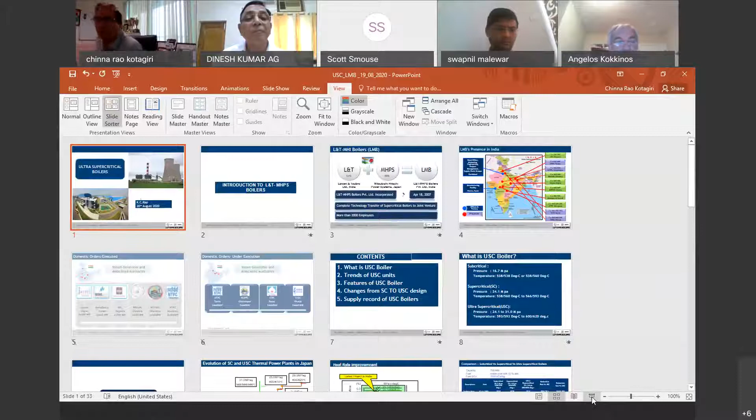Everybody is able to see the full slide mode? Yes sir, it's visible. Okay, of course before I go into the technical part, because maybe some people may not be knowing our company, since it is L&T MHPS Boilers, I will briefly show two slides of what we are doing, what is our company.

Sorry, it's not moving. Next slide has come or no? No sir. Now it has come, okay. Now it has come, yes.

This is a joint venture company between L&T and MHPS. L&T has 51% stake and MHPS has 49% stake. We call this company L&T MHPS Boilers, in short term LMB. This joint venture has been incorporated in 2007. The complete technology transfer for supercritical boilers is included in this joint venture. Right now we have more than 2,000 employees working for this joint venture who does only supercritical boilers.

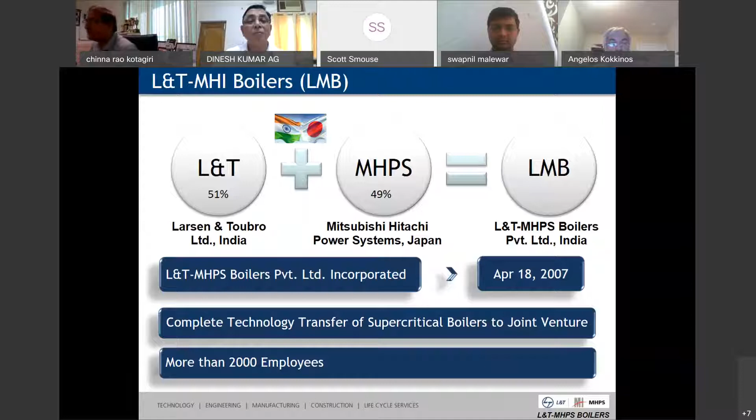If you go to the next slide, you can see that our main head office is in Faridabad, where we have marketing, engineering, project management, and supply chain groups sitting. And we have a manufacturing facility in Hazira, Surat, where we manufacture all our pressure parts. You can see that in the last 10 or 11 years, we have executed many projects.

You can see the units starting from Rajpura, Chhabra, Nigrie, Malwa, Koradi, and Khargone. All these projects have already been commissioned and handed over to the customers. The units Tanda, Ghatampur, Buxar, and Khurja are under execution right now. NTPC Khargone is the first USC unit which has been commissioned in India, and that has been done by us. This is briefly about our company.

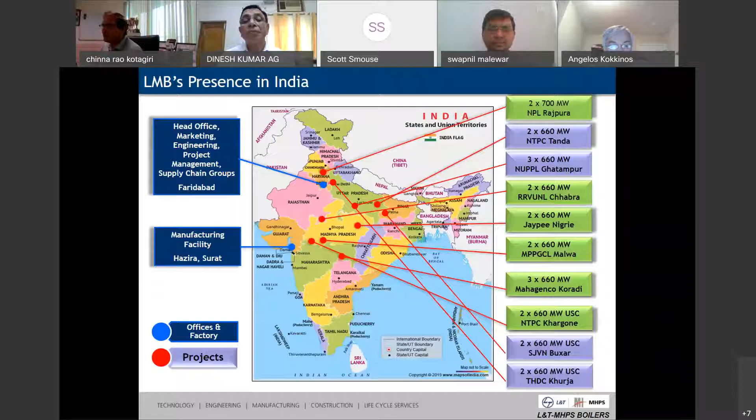Now I will come to the ultra supercritical boilers introduction. This, of course, everybody in this audience must already know, but just to refresh, I have given subcritical, supercritical, and ultra supercritical definitions.

You can see that pressures of 16.7 megapascals is subcritical, with temperatures up to 560 degrees. Supercritical can go up to 593 degrees centigrade. When it comes to ultra supercritical, pressures can increase from 24 megapascals to 31 megapascals, and temperatures can go from 593 to 620. This is, of course, there is no universal definition — each country has different definitions. But in India, we follow temperatures above 593 as ultra supercritical boilers.

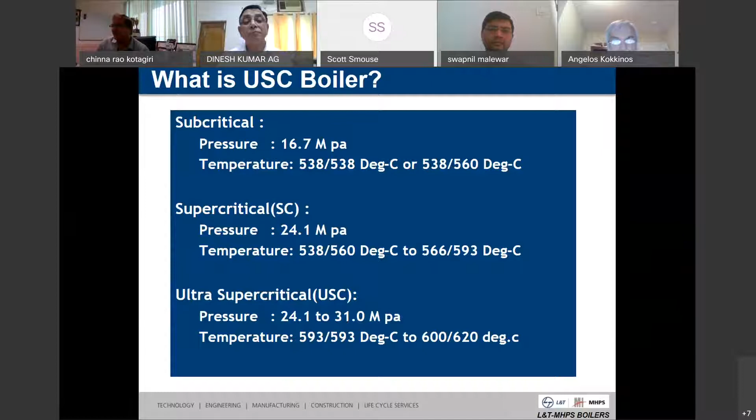So this is briefly about what USC boilers are and the trends. If you look at the supercritical units, you can see here. Since our partners are from Japan, I am giving the history of Japan, where they started the supercritical boiler very early, in 1968, with oil-fired boilers.

From 1968, it moved to coal-fired, and then coal-fired progressed to ultra supercritical in 1998. The first unit of MHPS was commissioned in 1998 with ultra supercritical parameters of 600 and 600. After that, it was increased a little to reheat temperatures up to 620. Though it reached that level worldwide, in India we are now at the 600 level. That is the first unit we supplied, to Khargone.

So that is an ultra supercritical unit. But the only change here is that the pressure is not 24.5 megapascals. In Khargone, we are giving it 27 megapascals, so the pressure is a little higher.

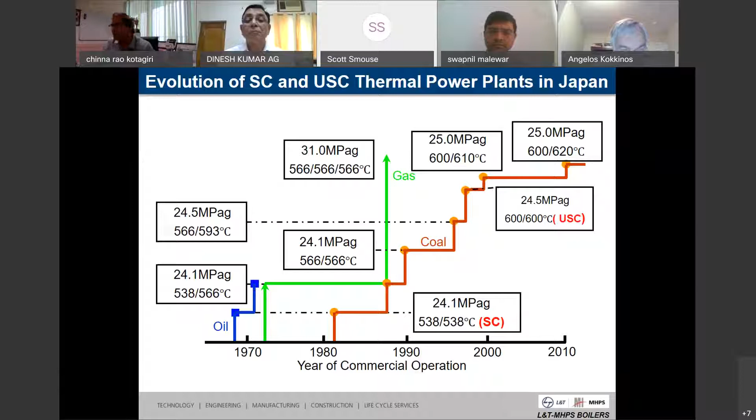This is just to show the heat rate improvements, how it goes from a subcritical unit to supercritical, and supercritical to ultra supercritical. You can see here the latest project in India. I am showing that for ultra supercritical we are at 600, but the pressure is a little higher, that's why we have shown the star a bit on the upper side. So how the heat improvement takes place is shown in this slide.

You can see that from supercritical parameters of 566, 593, if you go to 600, there's approximately a 1.3% heat rate improvement. Since we are increasing the pressure, maybe another 0.1% will increase, so it may go to 1.4 or 1.5 sometimes, depending on the conditions. That is how it generally varies from supercritical to ultra supercritical. Of course, if you are able to go up to 620 degrees in the reheater, you may get another 0.5% heat rate improvement.

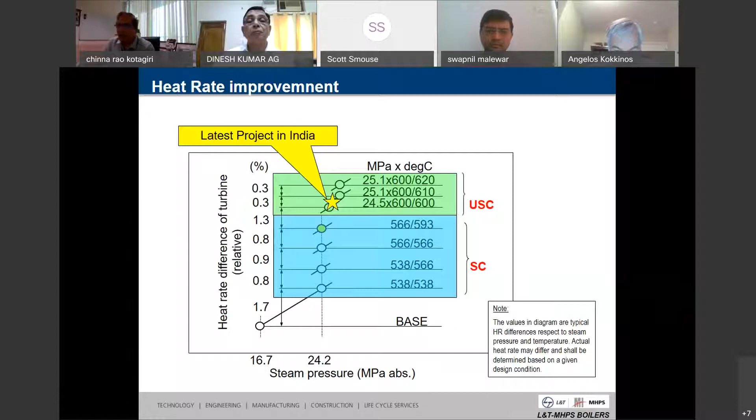The next slide, just to give an idea, though there are a lot of assumptions in it, shows that for a 700 megawatt unit, going from subcritical to supercritical and then to ultra supercritical, how the heat rate improves and how much savings happen in coal consumption, how much ash generation reduction will happen, and how much CO2 and SOx will reduce. Just for academic interest, we prepared this slide. You can see it is almost a 5.5% improvement from subcritical to ultra supercritical in all parameters, whether turbine heat rate, plant heat rate, coal consumption, ash generation, or CO2 and SOx - everywhere you get that much benefit.

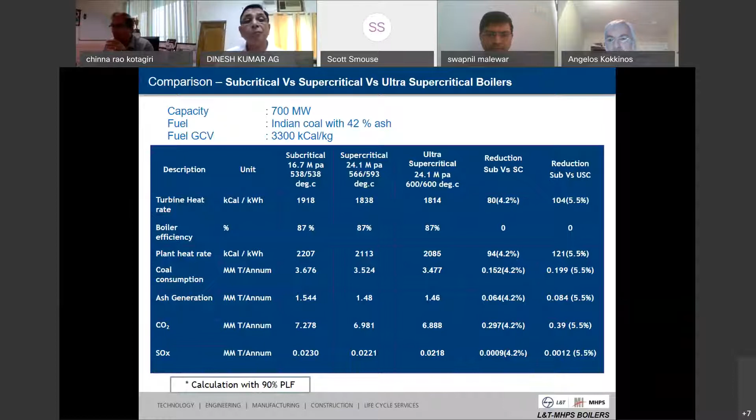Now I come to the ultra supercritical boilers which we have supplied. I'll show you the features of that particular type of boiler. You can see our boiler has some unique features. This is the ultra supercritical boiler supplied to NTPC Khargone. We have a vertical water wall - unlike most OEMs who supply spiral wall for supercritical boilers, we have a vertical water wall with a rifled tube in the furnace. We also use high steam temperature, 600-class high temperature resistant materials, especially for the final superheater and final reheater.

The third unique feature is we have a twin firing vortex - we have two fireballs in the furnace. Unlike other boilers which have a single fire vortex, or wall-fired, front-fired boilers, we have a twin fire vortex in a rectangular furnace wherein we have two fireballs within the furnace. Though we started this joint venture in 2007, at that time there were no NOx requirements in India - it was around maybe 750 to 760 ppm, something like that was the requirement.

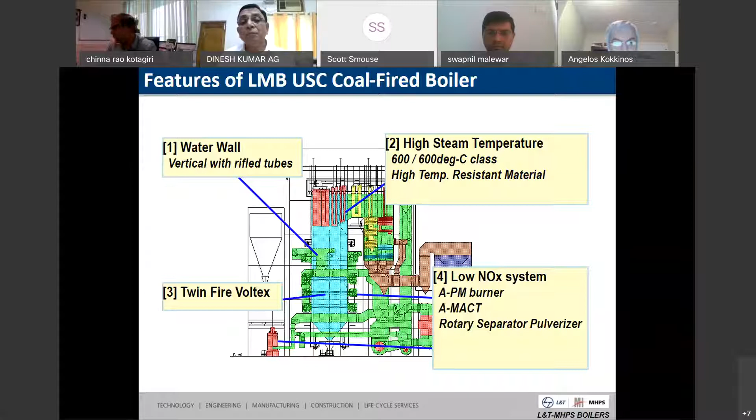In the plan you can see the two fire vortexes forming. From each mill, 4 pipes come out, and they are divided into 8 pipes. Each four pipes form one fireball within the furnace. The furnace cross section is rectangular, and you can see two fireballs happening.

With this, what happens is a low heat input per burner, because the number of burners is doubled. So the heat input to each individual burner is less, and that's why the slagging potential is very low in the furnace.

Final reheater temperature control is done using second pass gas side dampers. We have a second pass with split pass, one superheater side and one reheater side damper control. We control reheat temperature with the dampers. Though we have a tilting mechanism, it comes only afterward. First we operate with the damper and control reheat temperature without any spray. Only if we're not able to do it do we use tilting, as a secondary option. The superheater's temperature is controlled by the spray.

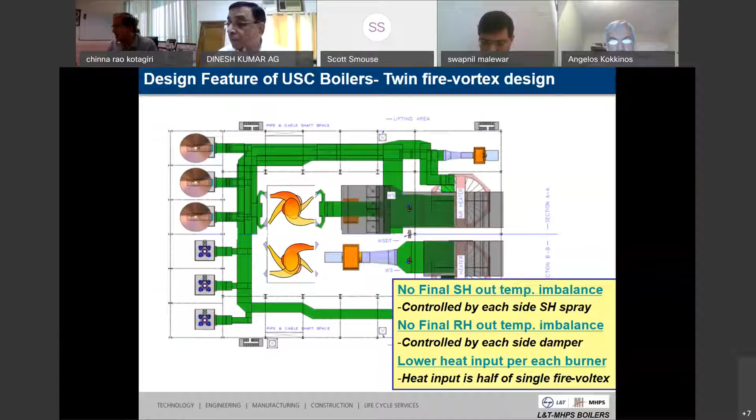These are the basic features of our boiler.

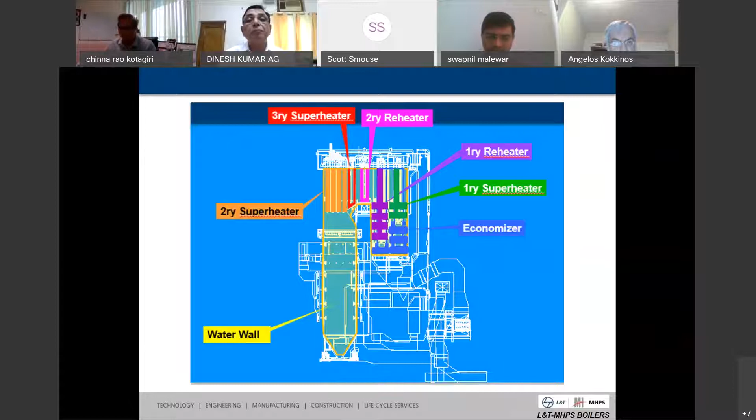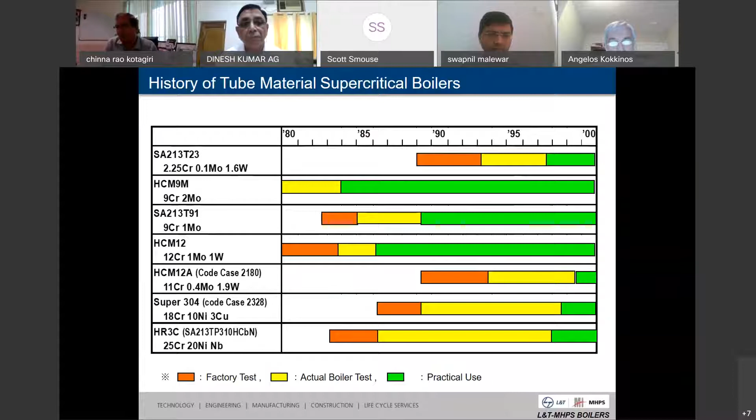MHPS does a lot of research when introducing any new materials for high temperature applications. When a new material is introduced, they do a factory test and then apply it in an actual boiler test. Once it succeeds, only then do they go for practical use. For some high alloy elements like Code Case 2328 and HR3C material, factory testing and actual boiler testing have taken almost 10 years of research before applying those materials in practical use. A material that comes into the ASME code is not just applied to high temperature applications in the boiler immediately—a lot of research is done for creep and fatigue before it's applied. I just want to stress upon that.

These are some of the ultra supercritical boilers and advanced materials we use, called Code Case 2115, Code Case 2328. These are 18 chrome nickel material and 25 chrome nickel material, T92, and Code Case 2199, T23, depending on the requirement. In Indian boilers so far we have not used T23, but our partners have experience using T23 in the primary superheater and primary reheater zones.

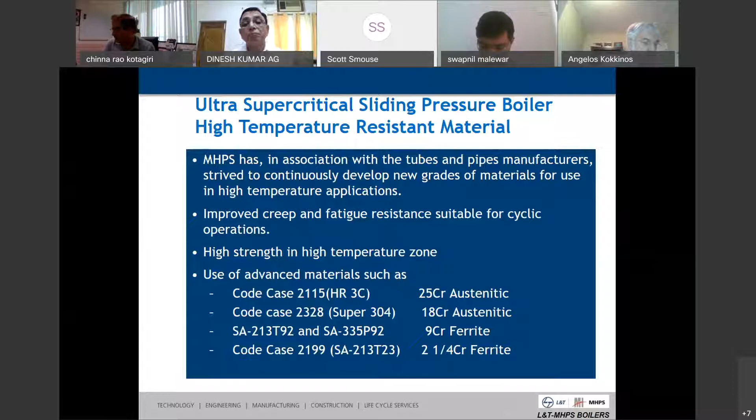This shows what materials we use in the ultra supercritical boiler. In the secondary superheater, final superheater, and final reheater, most materials are stainless steel, Code Case 2115 or Code Case 2328. These are the materials we use, except for the inlet area where we use T22 material, since metal temperatures are lower there. Otherwise all other material is stainless steel.

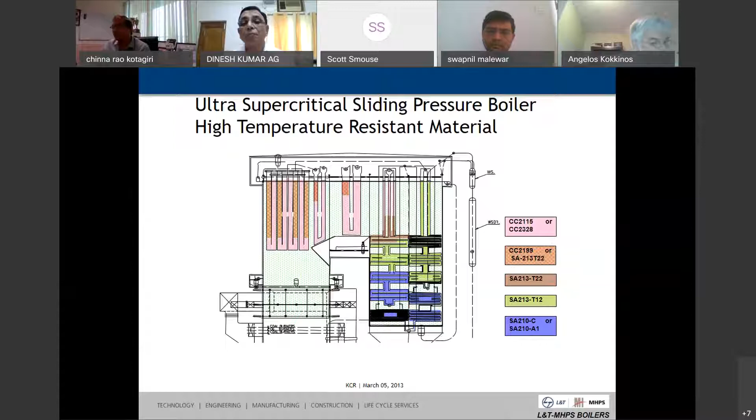When I say high temperature resistant material, we don't use T91, T92 materials because they have high potential for steam oxidation. So in the high temperature zones, in the gas path, we don't use T91 and T92 materials. For all other second pass areas, we use T22, T12, and SA210 grade A1. These are the materials we use, and we've presented them by section, showing how different materials are used in each.

These are some of the burners we use, low NOx burners, which we call advanced pollution minimum burners. In the burner itself, we have staging, two-stage combustion.

They have high ignitability and combustibility, high occupation rate of fire vortex in the furnace, and uniform heat flux distribution, because we have a twin fire vortex in the furnace across it, the heat flux will be uniform. Because of that, we achieve low NOx, low unburnt carbon, high efficiency, good operability, and low slagging tendency.

Since we have a twin fire vortex, the number of burners are more, so the slagging tendency will be less.

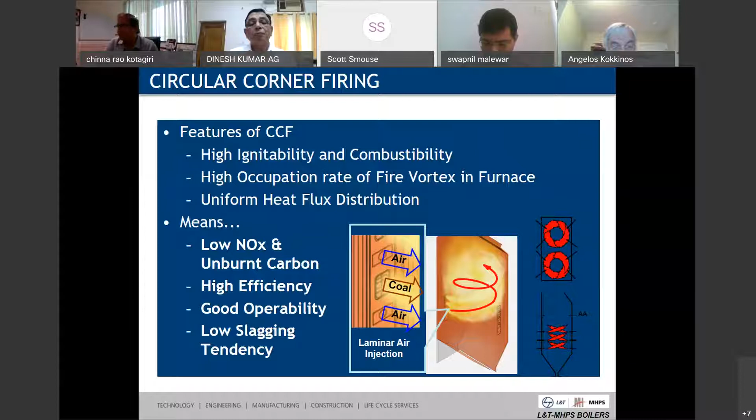This is again the burner front. You can see the main burners, and above the main burners we have additional air ports. With this particular technology, we achieve the low NOx.

I can tell you that our boilers, most of them at 100% BMCR, achieve around 115 to 125 ppm. At low loads it may go up to a maximum of 150 to 175 ppm at part loads. So that is the sort of burners we have already supplied, and our boilers are operating in India.

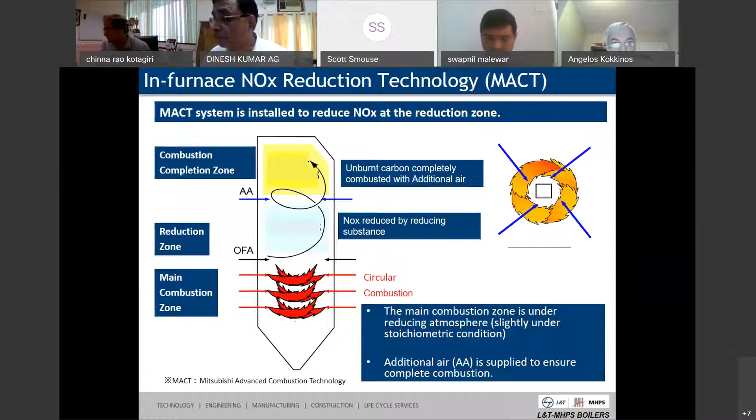Now I want to show, from supercritical boiler to when we change to ultra supercritical, what changes are going to come in the boiler basically.

In the pressure parts, the final superheater and final reheater surfaces will increase because we are increasing the temperature from 566, 593 to 600.

The tubes and thickness will increase because the metal temperatures are going to increase. The thickness of the tubes has to be changed for the final superheater and final reheater.

Headers' thickness and diameters will change.

Of course, there is no material change from supercritical to ultra supercritical up to 600 degrees centigrade. But if you go above 610 degrees centigrade, we may have to use Code Case 2115, which is a 25 chrome stainless steel material.

It depends on the metal temperatures which we calculate, but for some portions we may have to use Code Case 2115. Also, for some pipe materials, because of the temperature increase, the material changes from P91 to P92 in the headers as well as the critical piping.

Because the temperatures are increasing, shot peening of the stainless tubes has to be done for the final superheater and final reheater at the outlet of the tubes. Only one end, the outlet, needs the shot peening.

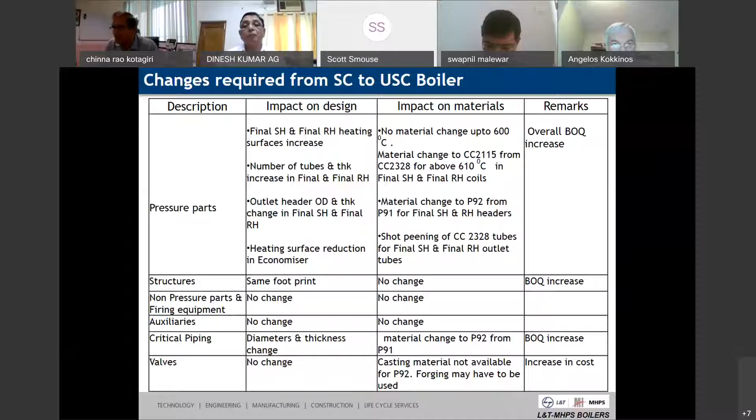This is again the same slide I had shown earlier, showing where the changes will happen - basically in the final superheater and final reheater, and in the respective headers as well. That's what I said in the earlier slide, represented again here.

Code Case 2115 will be used only when the temperature crosses normally 610 degrees. In India, since we have not gone to the 610 level, at least in Khargone we have not used Code Case 2115, as it was not necessitated. So we have not used this particular material.

Of course, P92 we have used for all the headers as well as the critical piping, which has been changed from P91 to P92.

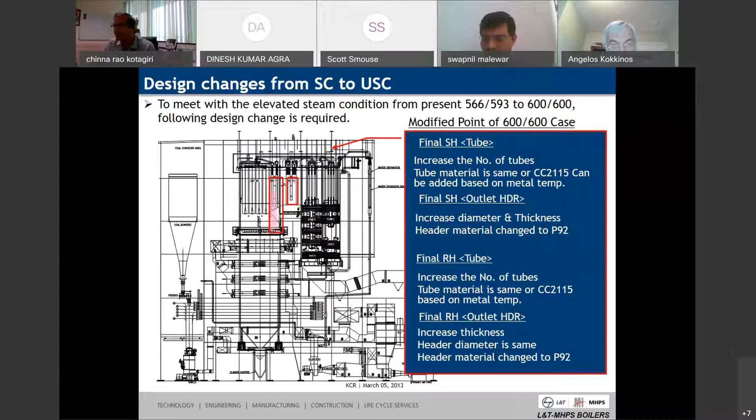That is briefly about ultra supercritical boilers, supercritical to ultra supercritical. What are the changes going to happen?

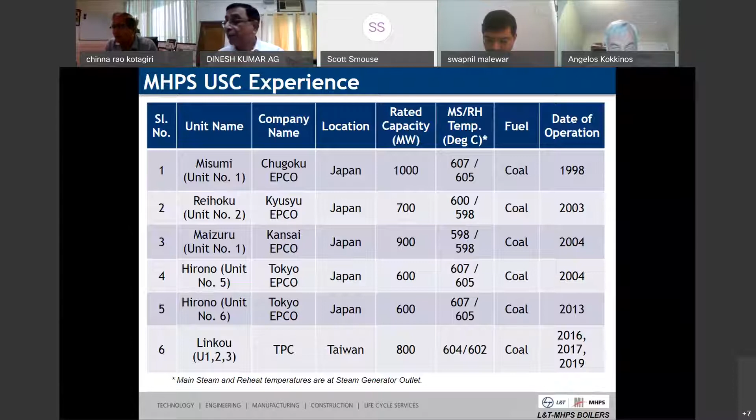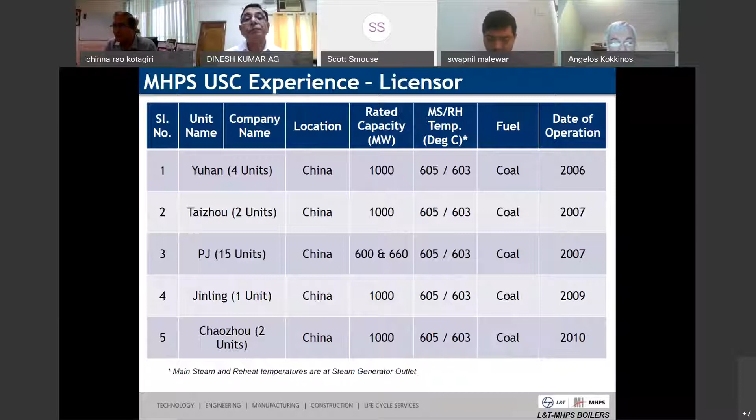I'll show some of our experiences in ultra supercritical boilers. Our partners MHPS Japan have experience. The Misumi unit, commissioned in '98, is operating at 607, 605 boiler outlet temperatures of main steam and reheat. There are other units, Maizuru, Hirono, Linkou, all Japanese units supplied by MHPS with ultra supercritical parameters. They have also supplied through the licensor in China with the same MHPS technology.

There are maybe more than 20 units operating in China with the same 600 degree temperatures. In India, we have done our L&T MHPS boiler. We did NTPC Khargone, the first ultra supercritical project, commissioned recently. The first boiler was declared COD in February 2020, and the second boiler in April 2020. Now we got the latest orders, 2 orders from SJVN Buxar and THDC Khurja, which are also ultra supercritical boilers under execution. We got these orders only about 1 year back.

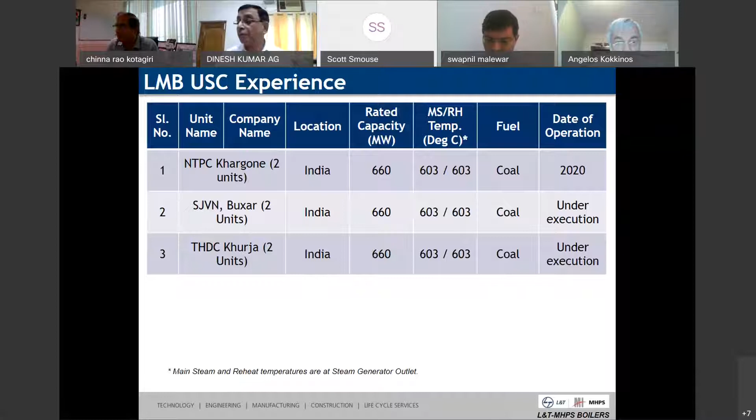Mr. Chidara, I request you to close in 2-3 minutes. Yeah, it's over, that's right. I will be closing in 1-2 minutes.

This is the Khargone ultra supercritical boiler supplied by us. The customer is NTPC Khargone, with commercial operation of unit 1 in February 2020 and unit 2 in April 2020, both completed COD. The steam conditions are 27.2 megapascals and temperature 603, 603. Fuel is Indian coal.

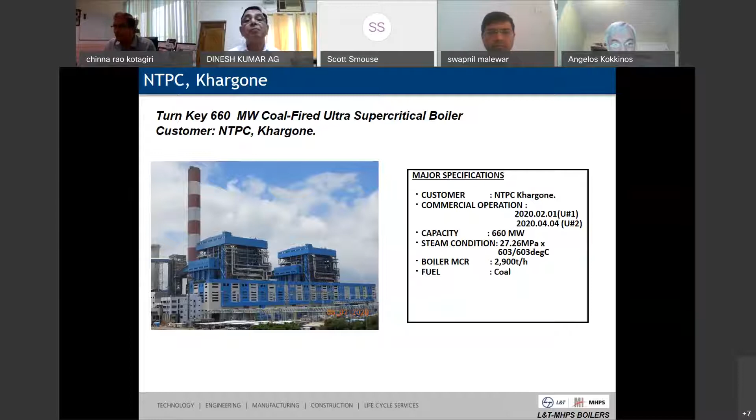As a starter fuel, LDO is used. We have successfully completed the PG test of the first unit about 2 months back, and we got the acceptance certificate from NTPC. With this, I am closing my presentation. Thank you very much. If you have any questions, you can ask in the chat box, I will reply.

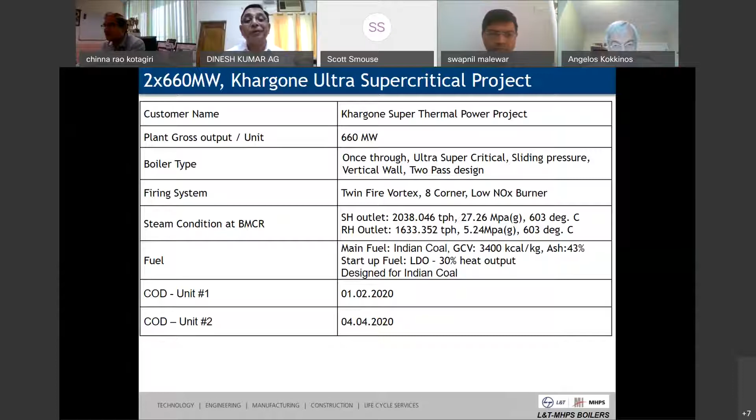Thank you very much, Mr. Agarwal. Sir, you are on mute.

Thank you, Mr. Chinna Rao, I really appreciate you sharing the experience in this area. Now I request Mr. V. Tanwani, AGM from NTPC, with Mr. Sagar Luthra and Mr. Abhishek Saini assisting him. The paper is on India's first ultra supercritical thermal power plant, Khargone. I invite Mr. Tanwani and his team to make their presentation. Thank you.

Mr. Tanwani. Yes, sir. Thank you, Agarwal sir, for giving this opportunity.

We welcome all participants to India's first ultra supercritical power plant, Khargone. In the next few minutes, we'll be covering project synopsis, then discussing key design features, and lastly key operational features and issues. Myself, Mukesh Kumar Barma, along with team members Sagar Luthra, Abhishek Saini, and our HOD Sri Vijay Tanwani sir, will be taking over this presentation.

Khargone, being the first ultra supercritical power plant, will operate at a pressure of 270 kg per square centimeter and a temperature of 600 degrees Celsius. We will have a unit efficiency of 41.5%, leading to a specific coal consumption of 2.6 with 3.3% CO2 emission reduction, making us the highest efficiency power plant in India.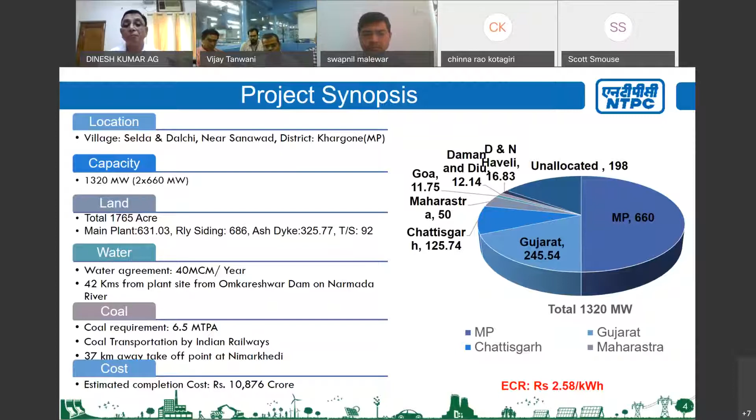The power has been allocated to 7 beneficiaries, with MP having the biggest share at 50%, followed by Gujarat, then Chhattisgarh, and then Maharashtra. Our current share is 2.58 rupees per unit. Coming to the commissioning timeline, for unit 1 we did boiler light-up on 29 December 2018, and within 180 days, we synchronized the unit on 27 June 2019.

We achieved full load on 28th August 2019, and the unit was declared commercial on 1st February 2020. Whatever learnings we made in Unit 1, we applied in Unit 2, which gave results in terms of reduction of timelines.

As far as Unit 2 is concerned, we did BLU on 21st November 2019. Within a span of 40 days, we synchronized the unit on coal on 31st December 2019, and within 59 days from BLU, we achieved full load on 19th January 2020. The unit has been on commercial operation post 4th April 2020.

Coming to key design features, we will be operating ultra-supercritical parameters, 270 pressure and 600-degree temperature, with a unit heat rate of 2070.

As far as boiler design features are concerned, Mr. Rao has covered most, but specially mentioned we have twin fire balls with a combination of rifle and plain tubes, and low NOx burners. As far as the turbine is concerned, we have all reaction stages to meet the peak load, the 105% unit load. We have been provided with overload valves.

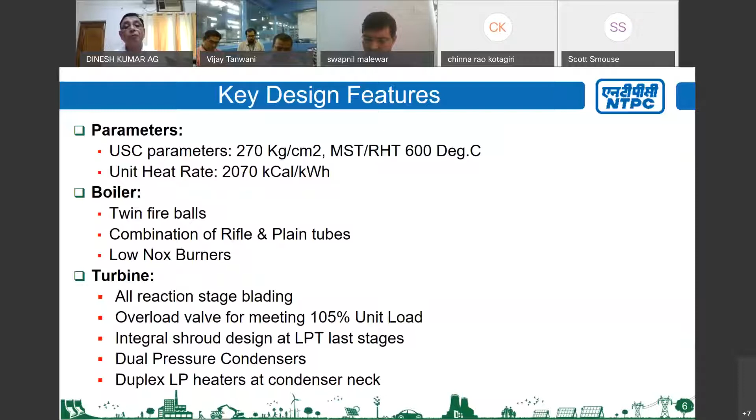Next, we have installed FGD. The technology has been provided by the Chiyoda Corporation, known as jet bubbling technology. We have ESP with a particulate emission level of less than 17 milligrams per normal meter cube.

We have a 400 kV GIS with 15 bays, and this is a compact layout as well. There is no separate zero liquid discharge system; this has been incorporated and built into the system.

We have an ETP system, coal slurry settling pond, AWRS, and STP. All of these together enable us to achieve zero liquid discharge.

As I said, we are taking water from the Narmada river, which is 42 kilometers away from the plant site. We have installed GRP pipelines with sizes of 900 mm and 700 mm.

Also, our township is a smart township with IT infrastructure covering home services, incorporating solar energy, smart energy and water management systems, and security and surveillance systems.

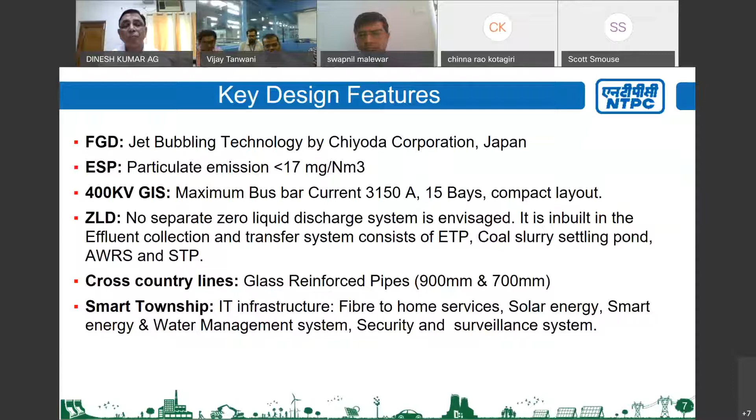Next, the key operational features will be covered by our colleague Sagal Luthra.

Good afternoon, friends. Certain key operational features of this particular boiler are that we're able to achieve the design parameters of 603 degrees Celsius even at part load.

Next, in the tri-sector RAPH which has been provided, the technology used is such that the gap between the sector plate and the seal is adjustable, which helps us maintain the cold end temperature of 116 degrees Celsius with almost 5% inbuilt air leakage.

The 8-corner firing system helps in better combustion. We can say that even in the last year of operation, we haven't faced a single MFT or flame failure, with a fuel coal of 2900 GCV.

Reheater spray has been minimized to almost zero by using GD dampers, and the temperature mismatch between the left and right superheater or reheater is almost nil.

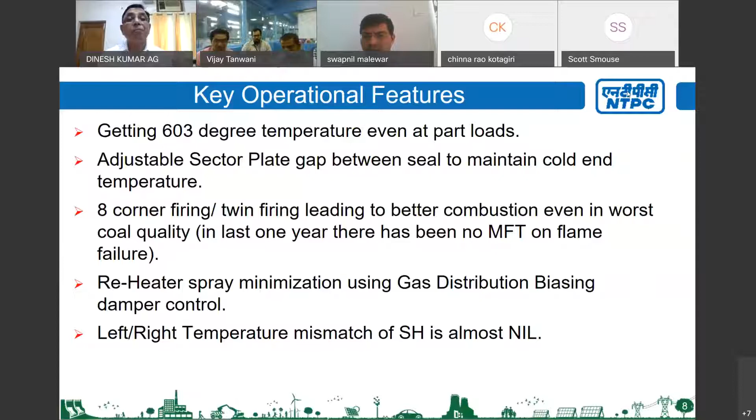One thing I want to talk about is that there is a very smooth transition from dry to wet zone or wet to dry zone, without any metal temperature excursion.

Since the quantity of feed water required for initial startup is very low, around 420 tons per hour, we can actually make a startup in very little time, with 1 MDBFP at only 30% capacity. The DP across the water wall is almost negligible, which helps us save a lot of power in the boiler feed pump.

And since during the startup of the turbine, the soaking speed is at 2300 rpm, this has led to better, more uniform heating of the turbine, helping us achieve better heat-up parameters and reducing the stress level in the turbine.

Next, I want to talk about vacuum deaeration in the deaerator, which helps us achieve dissolved oxygen of less than 5 ppb. Since the deaerator outlet vent is directly connected to the condenser, water loss through the deaerator vent is almost zero, as it's being utilized in the condenser.

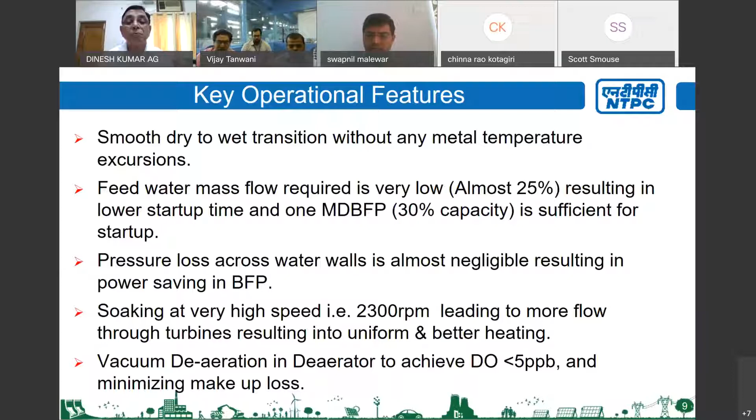So the next thing I want to talk about is the key issues we are facing in the operation of this ultra supercritical boiler. That would be covered by my counterpart Abhishek Sen. Thank you, sir. So apart from all the good things, we have some issues also.

The cleanup cycle takes approximately 45 hours during cold startup, because of the supercritical nature of this power plant. We need exceptionally good water quality to ensure good life of the boiler. So the cleanup cycle takes 45 hours, and this results in oil consumption of around 450 to 500 kL per cold startup.

There is no provision of wind box damper control after 30% load, so we don't have any control in the operator's hand. There's also no provision of biasing in the feed water loop. Sometimes the temperature may go out of hand, and without biasing in the feed water loop, which might have been helpful, we have no recourse.

During low loads, it is difficult to get differential pressure for superheater spray flow, because the superheater spray flow is taken from the eco inlet itself. Since at low loads the pressure is low in the eco itself, the spray pressure is very less.

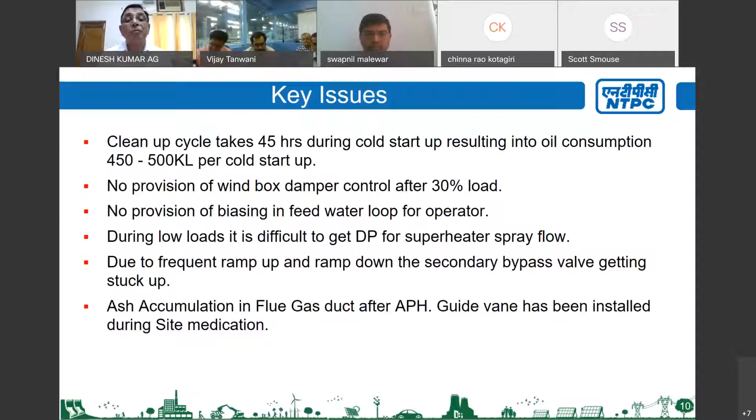During operation of OLVs, abnormal sound is being generated. There is no provision of seal steam pressure control in the TDBFPs. During low loads and high loads, we can't control the seal steam pressure in the TDBFPs, and this has led to some water moisture inside them.

MDBFP scoop auto tracking feature is also not available here. Whenever a TDBFP goes out, we have to load up the MDBFP manually, as there is no auto scoop tracking feature available here.

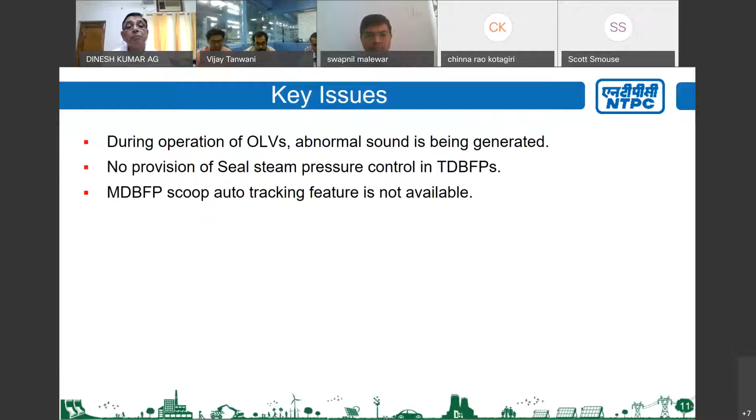So these are some key issues. Apart from this, during ramp up and ramp down, the temperatures vary a lot and we have to control them manually, probably because all the auto loops are not tuned properly. So these are the key issues I discussed. Thank you all for listening to us patiently, and we'll be open for questions later on. Thank you.

Sir, you are on mute. Sorry. Thank you, Tanmay and team, it's a good analysis you have given about the new unit which has been commissioned, and we will take up the question and answers at the end of the session.

Everybody can see this? I think you have to enlarge it. Just a minute. You see it now, sir? Not yet, sir. Could you try resharing your screen? Yeah. It's visible now. Okay, thank you.

So Nabha Power is a 2 into 700 megawatt supercritical thermal power plant located at Rajpura in Punjab. I'll briefly run through the company profile. It has a 25-year PPA with PSPCL, and a coal linkage with SECL. All the major equipment is manufactured indigenously through a technological tie-up with MHPS of Japan, state-of-the-art manufacturing at Hazira.

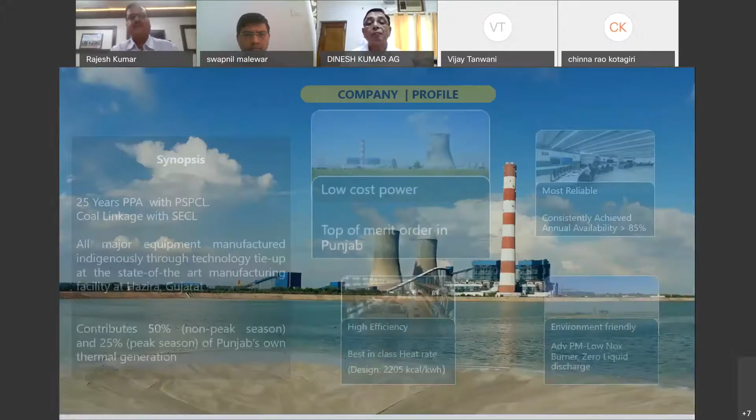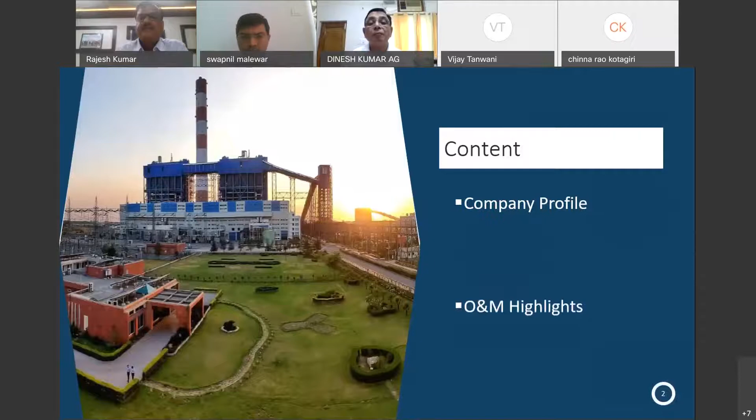Our plant contributes 50% during the non-peak seasons of Punjab's requirements, and 25% during peak seasons. We are top in the merit order of Punjab, and we are most reliable, consistently maintaining availability of more than 85% in the last 5 years. We are one of the most efficient plants, with a designed heat rate of 2205 kilocalories per kilowatt hour. We are environmentally friendly, with advanced PM burners and zero liquid discharge.

This is the performance indicators of the last 5 years. You can consistently see that our availability has been higher than 85%, which is the normative PLF availability. Consistently, since the first year it was 91%, and after that also it has been above 85%.

Our heat rate is also very close to the design. Last year we closed the year with 2281 kilocalories. Our internal target to allow for partial load operation was 2295. So we achieved better than the target last year also.

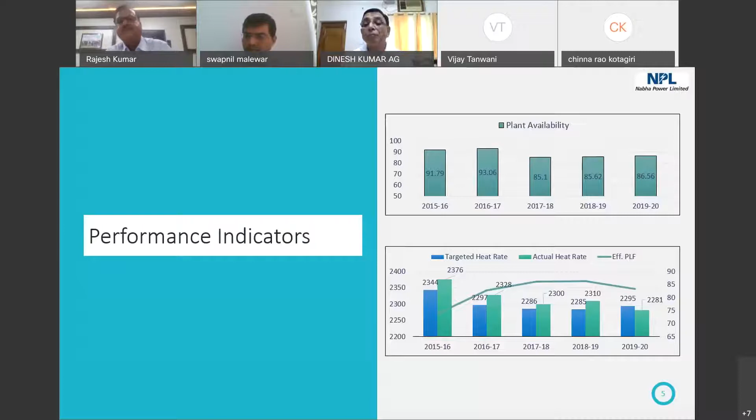All our O&M best practices are driven by 3 pillars, that is safety, reliability, and sustainability, in this order. Our reliability is taken care of by efficient and economical operations of the plant, propped up with monitoring and optimization, and sustainability is through economical and clean generation of the power through effective control, review and monitoring of the systems.

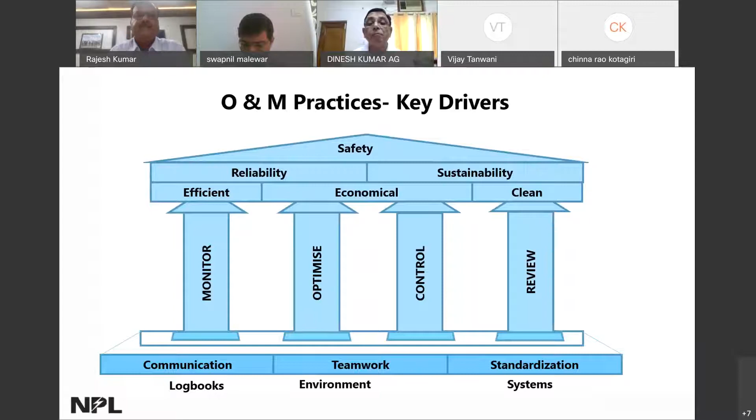We have gradually switched over to reliability centered maintenance after 6 years of operation, and we are on that path of journey. We started with preventive maintenance, corrective maintenance, and a combination of predictive as well as proactive maintenance. Then we switched over to reliability centered maintenance. In future, we can go to a risk evaluation and prioritization system. In reliability centered maintenance, we have lowered the cost with high availability also, so it is an optimal mix of maintenance cost as well as availability.

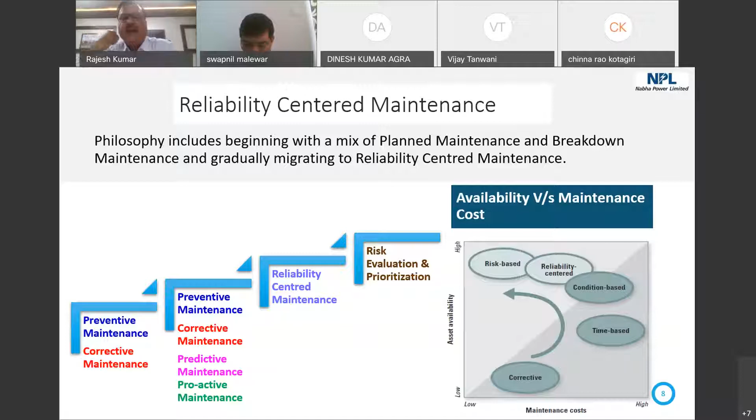As coal is in shortage during the peak season of this plant, we are firing different types of coal from wherever sources we are getting, whether imported as allowed by PSPCL or through different sources as given by SECL. Last year we fired a mix of imported and domestic coal with GCV ranging from 3,300 to 5,700 kilocalories, including Indonesian coal with high VM and high moisture, with moisture content from 11% to around 20 to 22%. This simultaneous firing of 4 different types of coal without any incident was a great achievement. We achieved this with very minimal metal temperature excursion or any adverse impact on combustion, without deviating from the design limit.

This we achieved through development of an in-house automated tool for shift-wise temperature monitoring by the shift personnel, and on a daily basis it was monitored by the senior management team. We developed a special procedure for firing the Indonesian coal of high moisture with high VM to avoid any chance of mill explosion. We closed the year without any incident of metal temperature excursion or adverse impact on combustion, despite simultaneous firing of 4 different types of coal.

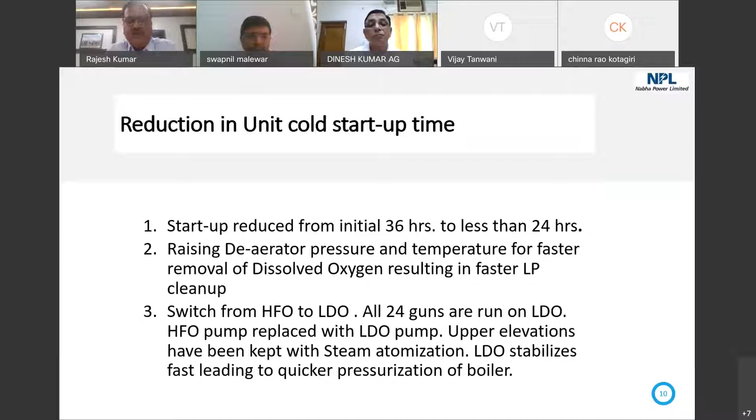In the ash handling plant, all the seal water is harnessed into the clarifier for ash water recovery. This has resulted in a huge saving of around 3,000 metric tons of raw water per day, so this much raw water drawal has been reduced.

We have switched over the bottom ash drawdown mode from shift-wise to a daily basis. Each day we do the bottom ash drawdown to check the flame intensity and whether there is any clinker formation or not, so this is checked daily.

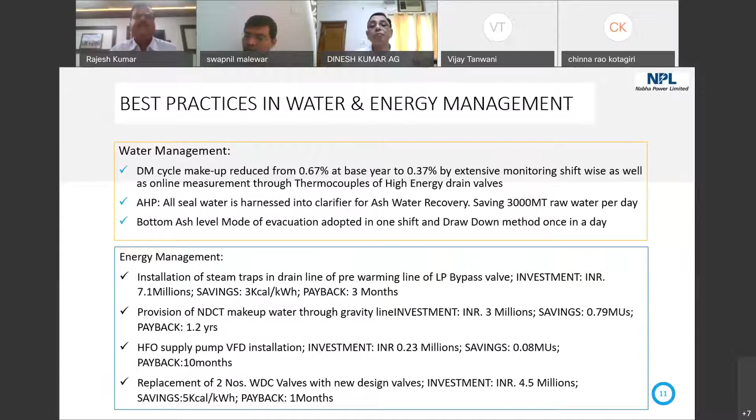We have switched over to oxygenated treatment, which gives increased focus on boiler water treatment. Coordinated water treatment, or oxygenated treatment, is better for reliability and efficiency. The magnetite layer changes over to a hematite layer, which is very smooth with no serrations, and the pressure drop across the tubes gets reduced. On the right side of the slide, you can see that in AVT mode the boiler pressure drop is higher, while in CWT mode, with the passage of time, the rise in DP is very small.

It is almost constant. Effective monitoring has been achieved through online measurements, maintaining optimum dissolved oxygen at the boiler inlet, the economizer inlet, and in the condensate circuit, with online DO analyzers as well as ORP measurements. We have installed Mettler Toledo make chloride analyzers with accuracy less than 1 ppb, because chloride control is very essential at high pressure and temperature for the boiler and turbine. We also get yearly deposit analysis done at a reputed external lab. In a nutshell, the healthiness of SWAS is key for a supercritical boiler.

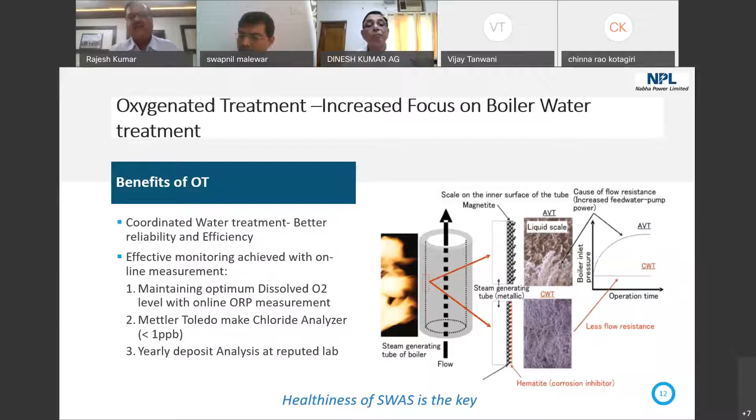We have developed a state-of-the-art coal lab. Through the laboratory information management system, samples are collected through auto samplers and randomly coded. The entire system requires no manual intervention, so the chances of human error or other mistakes are totally avoided.

Rake registration is done, and a barcode is generated on a random basis for each sample. Throughout the testing cycle, nobody knows which sample is which, because as a load center plant we get coal from different sources through SECL, through imports, or through different parts of CIL via multiple sources, so this is very important. Since coal is transported from 1500 kilometers away, there is a high financial implication if there is even a slight error in measurement of GCV.

So this LIMS integrates the GCV, proximate analysis and moisture content, and delivers the final results.

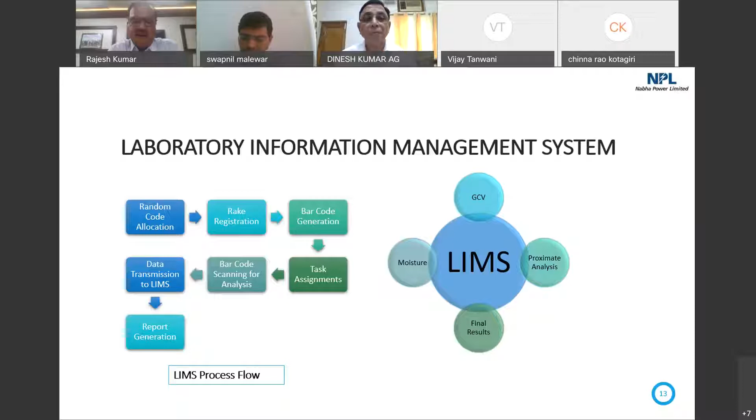Our coal lab is NABL certified. It has all the modern facilities, and a highly experienced team. And the LIMS, as I told, there is no manual intervention; the complete process is automated and without any tamper. It is totally tamper proof.

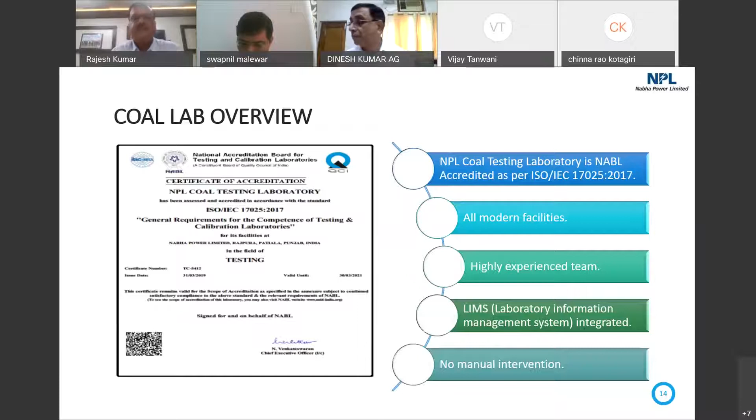As you all know, the power sector is very vibrant nowadays, and it requires a lot of challenges, a lot of monitoring, effective monitoring at multiple levels because of integration of renewable energy, flexibilization, etc. So at Nabha Power, we have taken a lot of initiatives for digitalization.

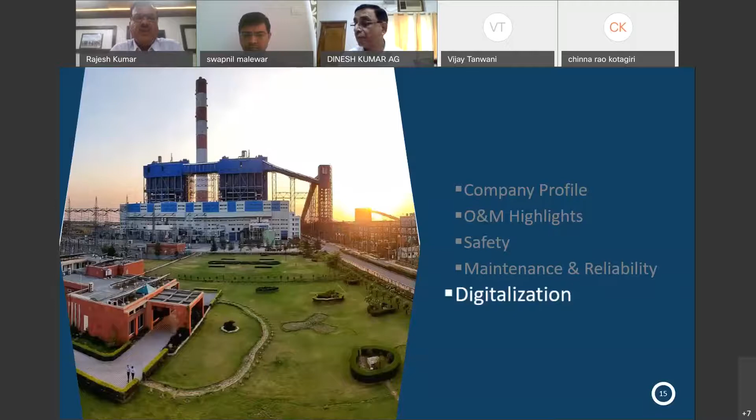We have developed an operator training simulator, a virtual method to provide training to new operation engineers. It simulates startup, shutdown, process transitions and changes, and all abnormalities and runbacks can be built into it. It is a Protex-made software where engineers can simulate different situations, run them, and learn.

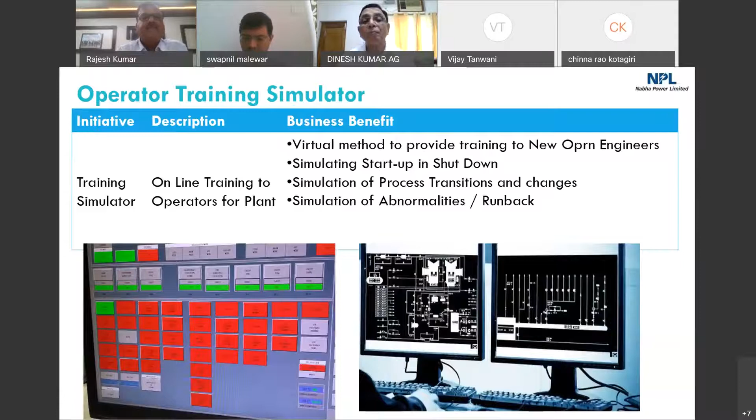We have a very effective vibration monitoring system where all the data is collected at a software, which fetches real-time data from all the critical drives, turbines, fans, mills, etc. It analyzes that through FFT analyzers and orbit analyzing, and finally gives input for the maintenance engineer and our technical services team to do further root cause analysis. This is a very, very effective tool.

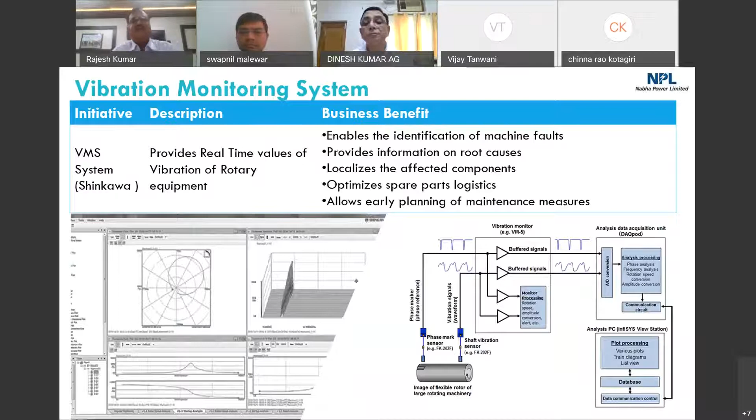We have a maintenance management system, Maximo, which we have put on mobile also. So it is available to all the senior people on the go. Work can be seen remotely from anywhere. It can be securely accessed. Approvals can be done on mobile, so that faster decision making is done.

We have also developed a module in Maximo for HSE, where hazard identification, risk assessment, incident reporting, and risk investigation can be done. Safety instructions and even regulatory compliances are built into it. All senior persons can see on mobile which compliance or which licenses are about to expire, so that corrective action can be taken in time.

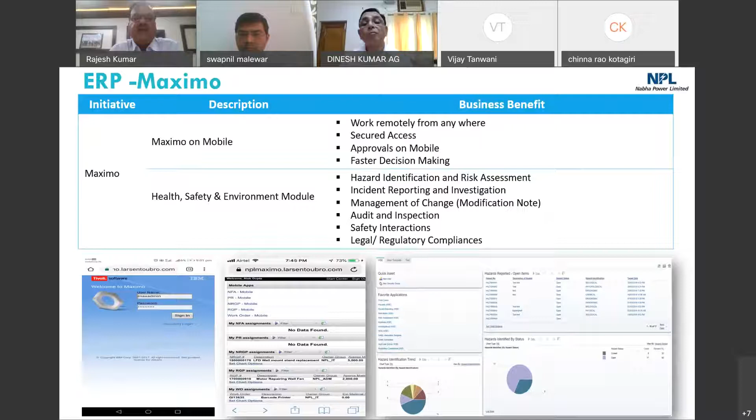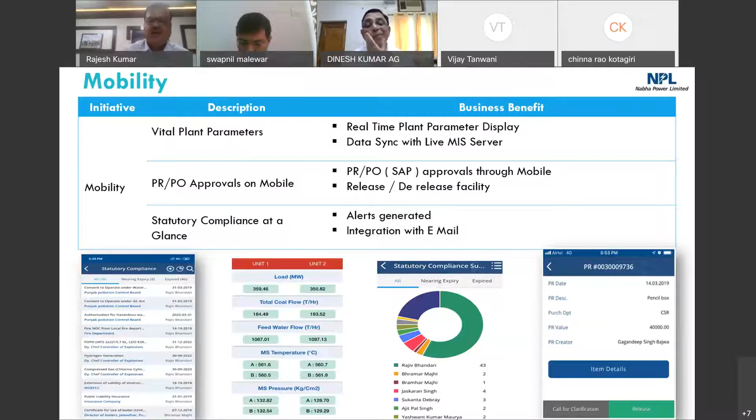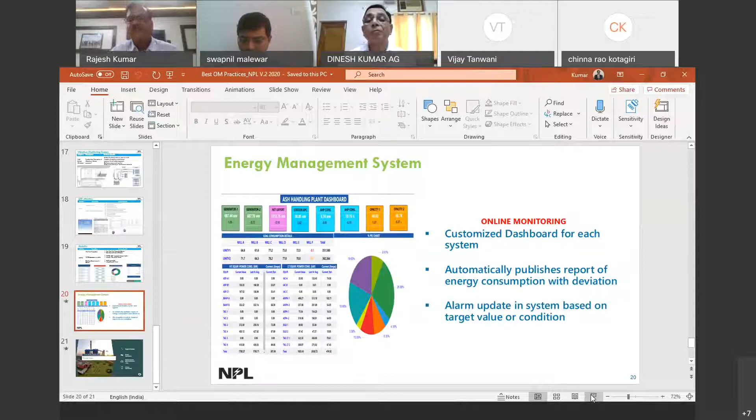Sir, I think we have to close in the next one or two minutes. Okay sir, this was the last slide. Thank you, sir, thank you so much. Thank you, I would be taking all the questions at the last, if any. Thank you, sir, thank you for providing us the insight of Nabha, and Nabha is definitely performing very well.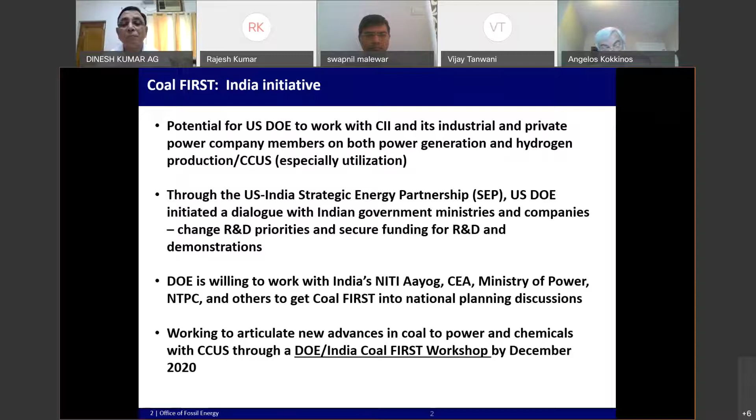What do we hear from the stakeholders in our R&D program? One, that coal must play and will continue to play a role in future energy systems. Two, that there has to be an improvement in base-loaded plant efficiency.

This improvement must apply to both new and existing generation, such that it makes coal generation more commercially competitive, while at the same time eliminating air pollution, including being carbon neutral.

As you have noted, capacity factors, at least in the United States, have dropped to levels of 50%, requiring these plants to spend increasing time in cycling mode, therefore requiring that we address reliability, lower efficiency, and the shortening of expected plant life.

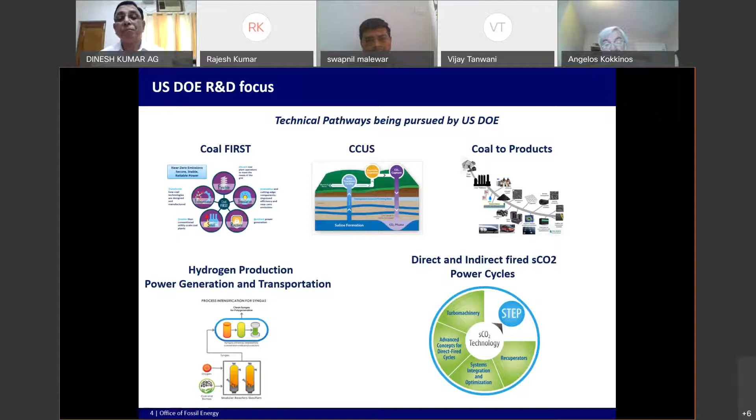And last but not least, looking at creating new advanced power cycles using things like supercritical CO2 as the working fluid, both in a direct and indirect manner. Next slide, please.

Let me talk about Coal First. As I mentioned, it stands for flexible, transformative, innovative, small, resilient plant. By flexible, we mean it has to have high turndown rates, high ramp rates, and shorter startup times.

It also has to be highly efficient, more efficient than the current state-of-the-art advanced ultra supercritical systems. It also has to have zero or near zero, including net negative, CO2 emissions when co-firing coal with biomass.

It is the only power plant R&D effort in the world, as we know it, trying to achieve this type of plant, this type of performance level. We also wanted it to be flexible in terms of, if possible, producing power and/or hydrogen for polygeneration, either hydrogen for power or hydrogen for chemical production.

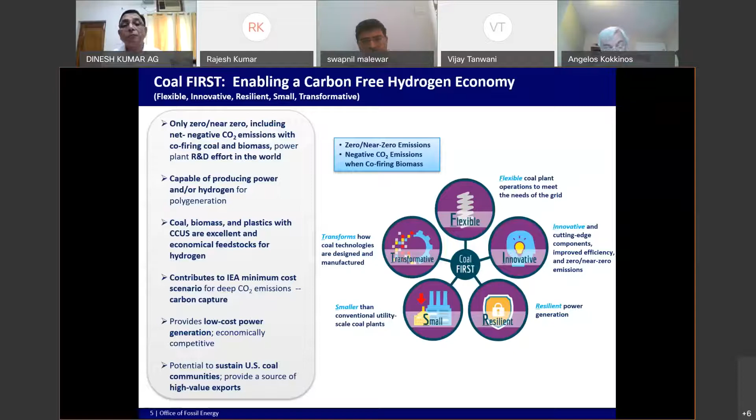Why are we looking at hydrogen? A lot of countries, ourselves included, are looking at possibly transforming into a hydrogen economy. As you see the CO2 emissions, it's interesting to note that transportation now has surpassed power generation and industrial energy generation in terms of CO2 emissions. And hydrogen allows for having a transportation sector that is CO2 free, but also other criteria pollutant free, such as hydrocarbons, particulates, and NOx.

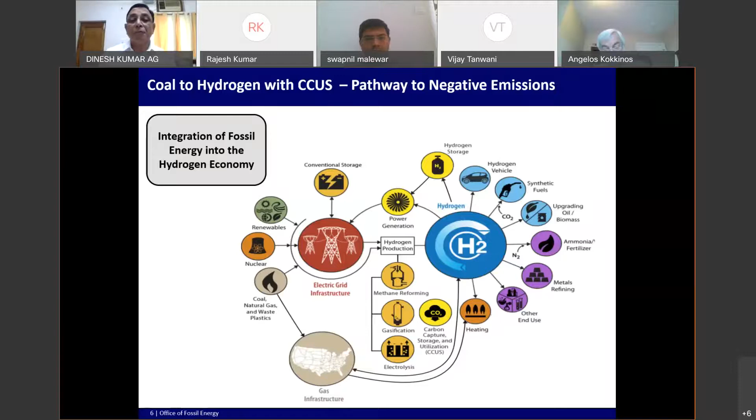Hydrogen can be produced from fossil fuels. And if you go to the next slide, it can be produced at significantly lower cost than what it can be produced through the process of electrolysis, including when the source of electrical power is the so-called free renewable power sources such as wind and solar.

As you can see from this slide, hydrogen produced through coal gasification with carbon capture, CO2 capture and storage system can be produced up to $2 per kilogram. Hydrogen produced from steam methane reforming from natural gas can be with carbon capture, CO2 capture and storage can be produced for approximately

$2.50 per kilogram. We in the United States have done a significant amount of research in using hydrogen for power production, and we have developed combustion turbines that run on hydrogen, and we intend to continue working on advancing this type of technology. Next slide, please.

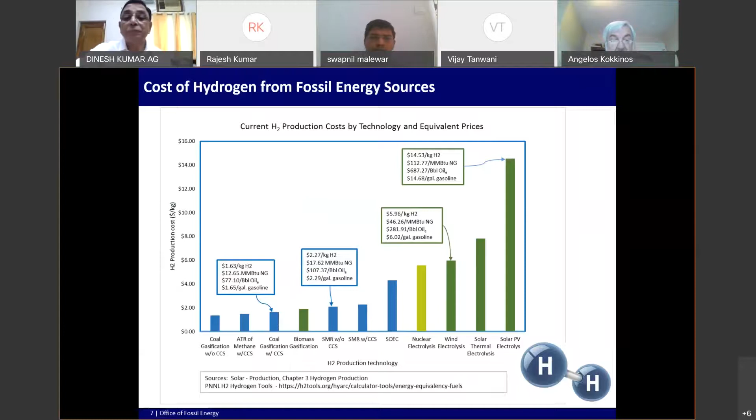I mentioned that hydrogen can be produced through fossil fuels, and indeed that is the case when you look at the world production of hydrogen. Approximately 70 to 75% of hydrogen is produced through steam methane reforming, about 20% is produced through gasification of coal, with the rest being through electrolysis. And the reason for electrolysis being so low is simply economics. The cost of electrolysis needs to be reduced by 75 to 90% in order for it to be competitive. Therefore, coal and fossil fuels are very critical in the production of hydrogen.

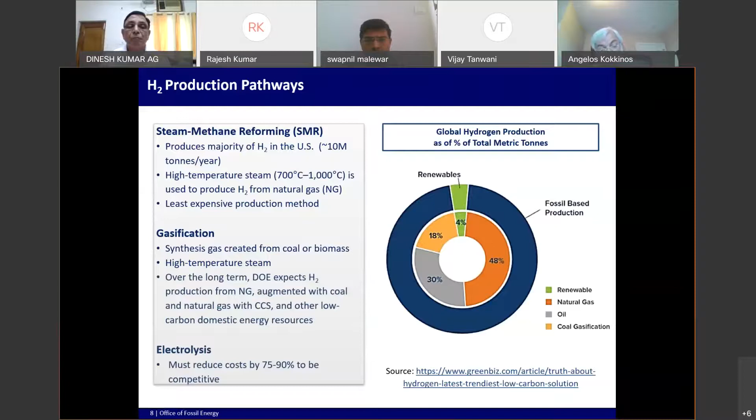Next slide, please. In the Coal First initiative, one of the programs we're looking at is what we call polygeneration, which is basically a system that produces power while at the same time it can produce hydrogen that can be used either as an energy storage system or as a power generation source. And all of that needs to be done with CO2 capture.

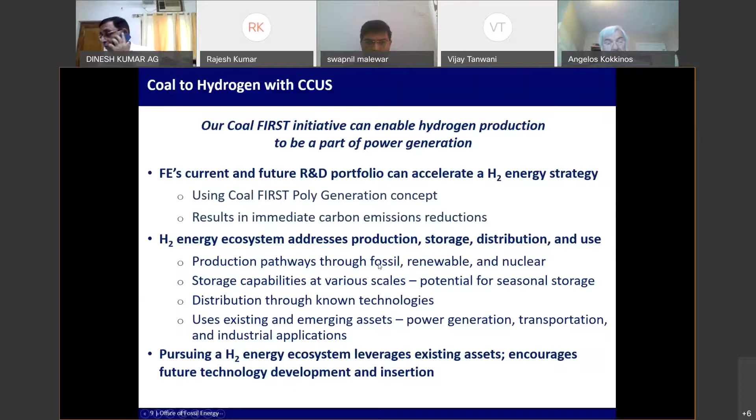Next slide, please. On the Coal First program, we have completed several pre-FEED studies, front-end engineering and design studies, looking at, among other things, a pressurized fluidized bed combustion system with supercritical steam conditions, an advanced ultra supercritical small flexible power plant that uses pulverized coal as the feed system. We looked at the supercritical indirect and direct power generation cycle, and we also looked at a system where we had an ultra supercritical boiler in combination with a natural gas turbine. As a result of all these pre-FEED studies, we are now in the process of requesting proposals for full FEED studies.

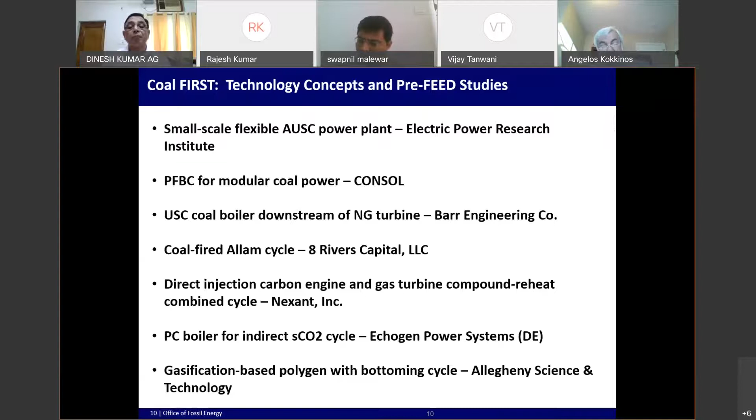And if you can go to the next slide, for 4 technologies. These full FEED studies would be for a power plant size of 50 to 350 megawatts. And the 4 technologies we're looking at are: 1, small, modular, flexible, advanced, ultra supercritical coal-fired power plant. Second, pressurized fluid bed combustion with supercritical steam cycle. Third, a hybrid natural gas turbine with an ultra supercritical coal-fired boiler power plant. And last, gasification of coal and biomass to generate electric power and carbon-free hydrogen byproduct.

All of these with carbon CO2 capture and utilization system. I want to go back a little bit and be very specific on some of the requirements. These systems will require a 5-to-1 turndown. In other words, they should be able to operate down to 20% capacity without any support fuel. Second, they need to have less than 8 hours startup time. And third, they need to have 4 to 5% of MCR per minute ramp rate. So these are some of the requirements we are looking at.

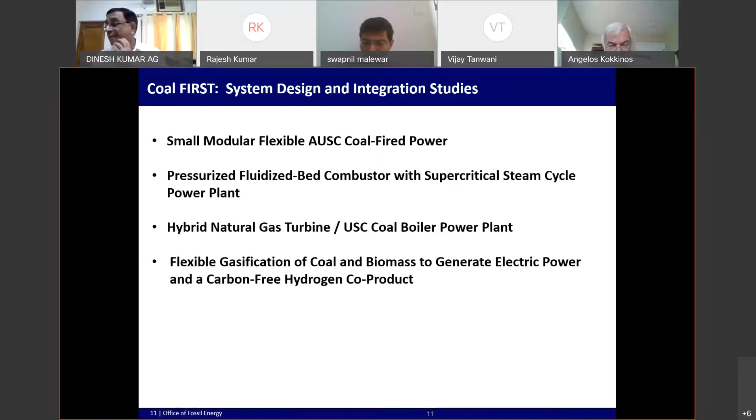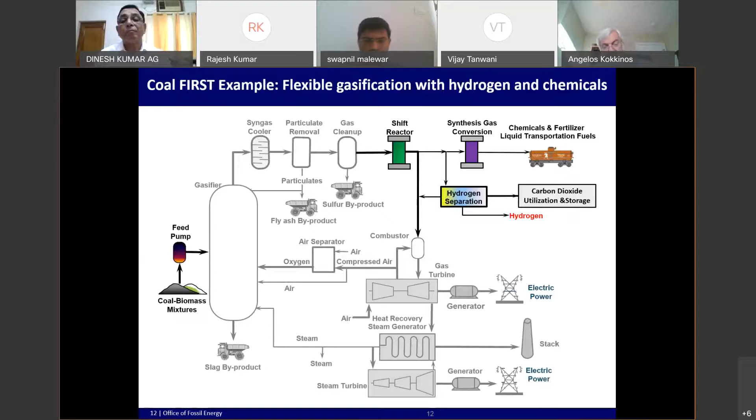If you can go to the next slide, please. This is just a process flow diagram of the flexible gasification power with hydrogen and chemical production system. And if you go to the next slide, I would like to mention this.

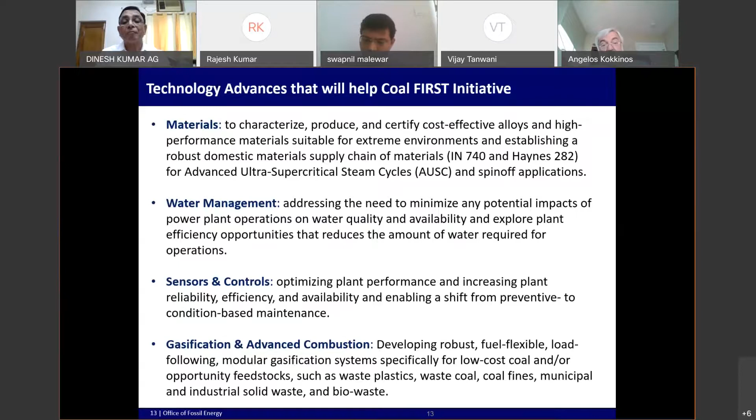Thank you, Angelos and Mr. Scott Smouse, for giving insight about the new initiatives being taken for utilizing coal and competing with environmental conditions to meet all those types of requirements. And I'm sure those types of requirements will be needed in the near future because of the many boundary conditions of the environmental norms.

All the success. I think we have come to the end of the session, and all 4 presentations were very interesting, covering new developments. Some of the papers cover the new units which are commissioned recently in India, and they are very efficient in terms of heat rate, and the designs are also unique in many respects. I'm sure they are going to be leading, and maybe many states will be running these units as base operating stations because of their performance.